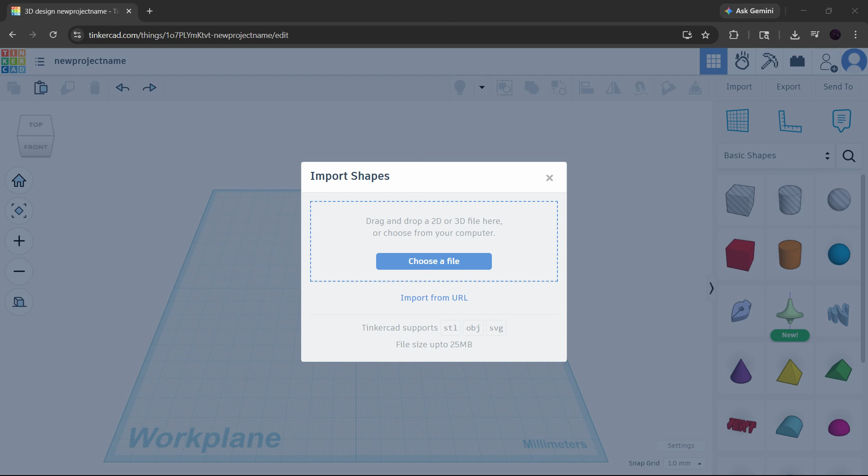Before you import it, pay attention to the scale settings. Sometimes the SVG may appear much larger than expected, so it's a good idea to reduce the scale to something like 10% or 20% before clicking Import. This helps keep the image the right size and saves you time resizing later.

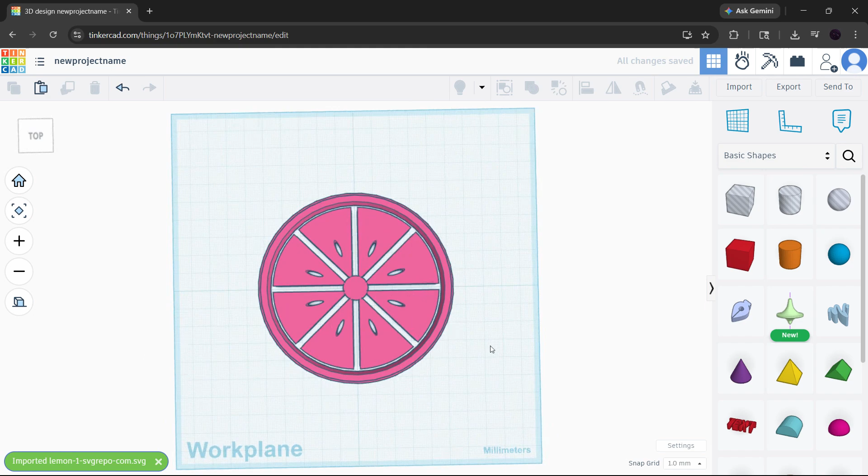After the image imports, it will appear in your workspace as a solid 3D object. From here, you can adjust its thickness using the white square in the center of the shape. If you want the image to look thinner, lower the height. If you want it to stand out more as a raised design, increase the height slightly. This is useful for making name tags, logos, signs, and custom 3D prints.

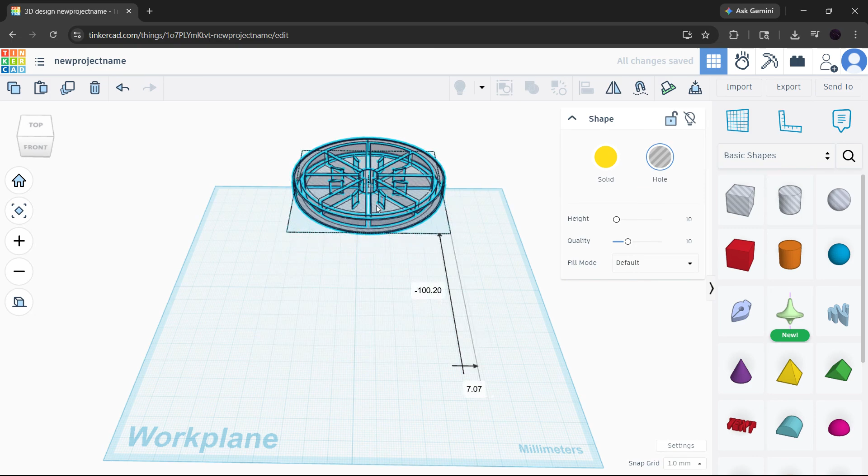If you want to create an etched or engraved effect instead of a raised design, you can make the image a hole. To do that, select the object and change it to Hole in the Shape Inspector. Then place it on top of another object, position it exactly where you want the cutout to appear, and group the shapes together using Ctrl+G. Once you group them, Tinkercad will subtract the image from the base object and create the engraved effect. This is one of the best ways to use images inside Tinkercad for creative 3D projects.

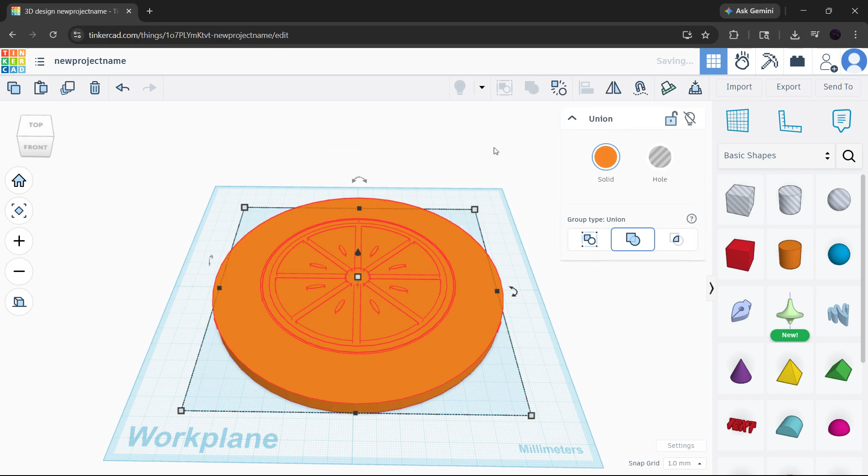A few extra tips can make the process smoother. Always use simple images with clear edges. If the conversion looks messy, try a different image with less detail. Also, make sure your SVG is clean before importing, because too many tiny details can make the design harder to work with in Tinkercad. If the object imports too large or too small, just adjust the scale and try again. With a little practice, you can create really clean custom designs for 3D printing.

So that's how to add an image to Tinkercad the right way. Remember, the key is converting your JPEG or PNG into SVG first, then importing it into Tinkercad, resizing it, and adjusting it into either a solid shape or a hole.